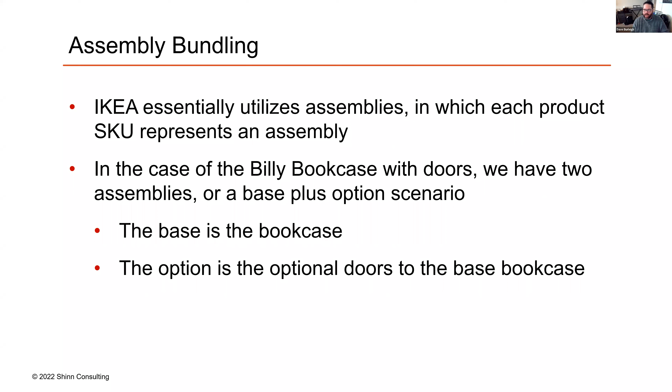In the IKEA model, they essentially use assemblies. For the Billy bookcase, the bookcase itself is one SKU, and the doors are a separate SKU. So similar to how we have a base house plus options, they assemble the same way—the base house in this case is the bookcase, with an option to add doors.

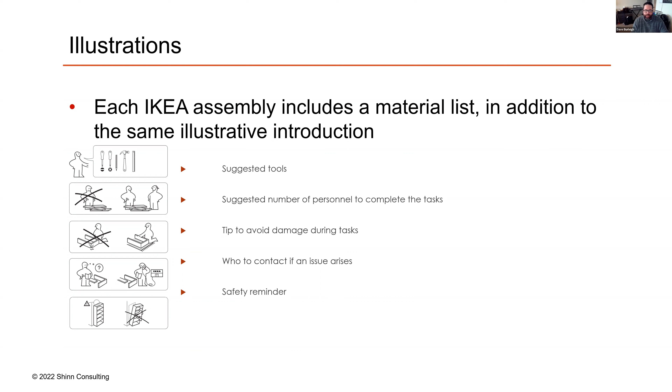Every IKEA assembly includes a material list. We can see their illustrative introduction on the side—they tell you what tools you need, how many people it should take to complete the task, tips to avoid damage while building, what to do if there's a problem, and they always finish with a safety reminder.

For universal application, IKEA uses pictures. If you go to the main page of their assembly guide, they offer instructions in 28 different languages. So instead of writing everything out in 28 languages, they use pictures to show how the parts and pieces go together to get the full assembly of the bookcase.

In addition to the pictures, each step details what parts to use. And if you get into an area where there may be a common error—like windows, corner details, trim details in the building world, things we're constantly fighting over—IKEA zooms into that area to make sure you understand the right way to do it versus the wrong way.

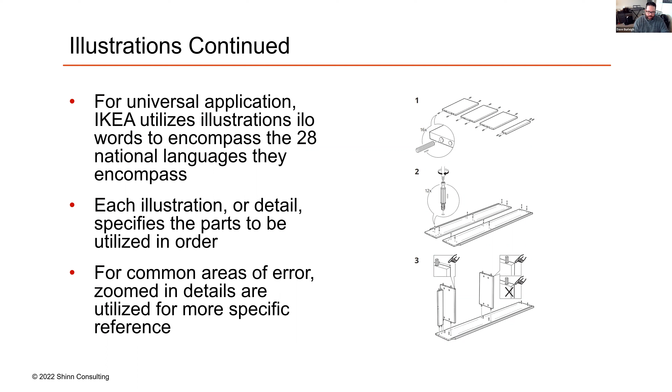They always give you a parts list. In addition to the illustrative version, they include the part number with each one, so you can quickly identify by picture what you should be using. And if you run into a problem, you know exactly what part number you have an issue with.

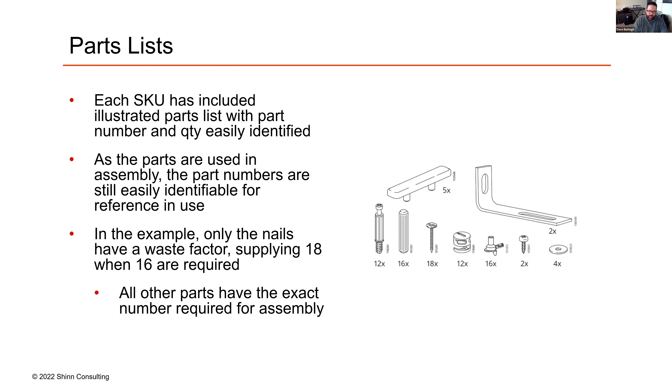In the building world, we think of waste factor as an all-or-nothing equation—we take an entire category like roofing and add a 10% waste factor. If we follow the IKEA method, we should really look at what specifically needs waste. In this example, out of all the different parts, only the nails actually have a waste factor, because that's where they've determined you're going to have a problem—so they give you 2 extra nails up front. Everything else, they give you the exact quantity needed to construct the bookshelf.

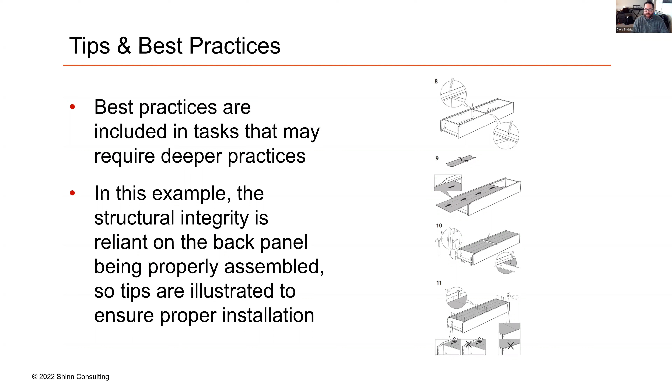Along with the instruction manual, they also give you best practices. In these illustrations, they show you to nail right in the middle of that center support, walking you through how to draw that out so you have a clear line to follow and know exactly how to use that material—again, knowing you only get 2 extra nails, they're helping you not exceed their waste by giving best practices on how to handle that.

For each step of the assembly, they tell you what parts to use, how many of those parts you need, and then show you how those different components come together for that particular step.

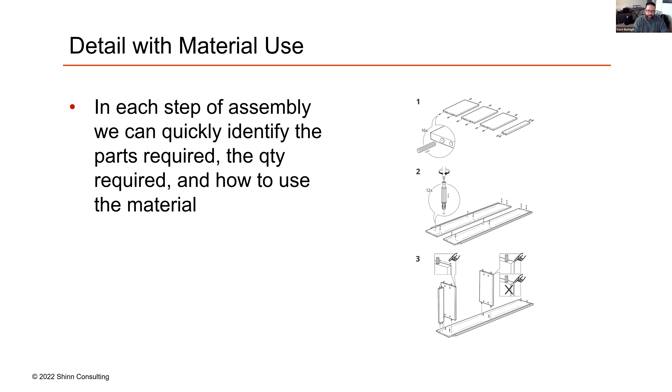As builders, there's a lot of things we should be doing similar to IKEA. If we did a true IKEA book on how to build a home, it would be a massive book. But we can use our detailed books to get into those obscure parts of the home, making sure we have clear trim details drawn out so people understand how we're doing crown molding or trimming out windows.

We want to have window and door details, so when our framer is framing, we don't want him to decide what's the best way to frame that opening. We actually want to tell him this is the way you need to frame the opening, because the amount of material we've supplied is the amount it's actually going to take to do the job. If we give them the material but don't tell them how to use it, we're setting ourselves up for problems.

Same with corners. When we're framing our corners, we like to avoid terminologies like 3-stud corners and 4-stud corners, things that have some gray area in what that actually means. We want to detail how we frame corners, how we frame an inside corner, how we frame an exterior corner, how we frame our wall intersections. We want clear illustrative examples of how we expect that work to be completed.

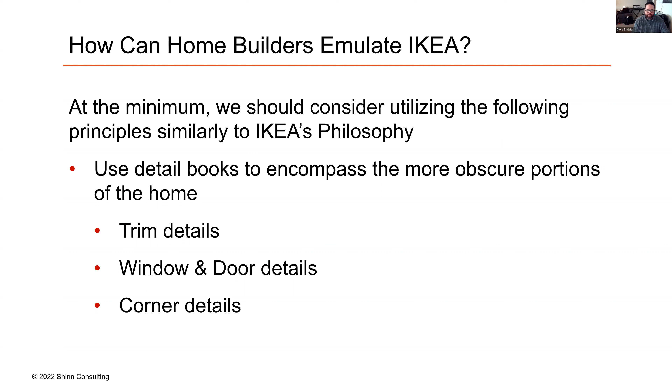Second is communication. We don't need to worry like IKEA does about 28 different languages in construction, but generally speaking there's at least 2 languages being spoken on our job sites. To help overcome that, illustrations really help. If everything is just written out in a scope of work form without illustrative versions of what we need, we're creating a language barrier for ourselves.

We want to make sure that anything we're passionate about, where we're very concerned we want a specific method used or a specific way to do something, we try to use illustrations instead, whether that's from CAD or a detailed book, whatever method you want to use, so that someone can quickly look at the picture and understand what it is you're asking to be done.

Our material lists should also be clear and concise. We want to make sure our descriptions are easy to understand and free of confusion from similar parts. We have multiple parts that go onto a purchase order that are very similar with some minor differences. We want those differences clearly stated so our trade partner understands exactly what it is we're asking to be delivered to the job site.

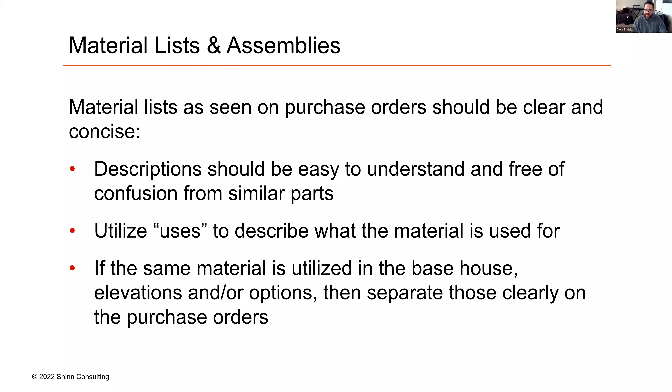By the same token, if we're using the same material—studs is a great example—in both the base house, and then we have additional studs because of an elevation, and additional studs because of structural options, we want those labeled as such so the trade partner understands how many studs went to base house, how many I added or subtracted due to an upgrade in elevation, and how many for each structural option, so they understand exactly what we supplied and for what purpose.

We could turn on another layer to see how much drywall we need. When we build out those assemblies that way, we're following that IKEA method of not worrying about what it takes to build the entire house at this point—I'm worried about what it takes to get through this wall specifically. Then I add all of those assemblies together to get my total material for the home. This also gave us an illustration we can provide to show how to build that specific wall, showing clearly what went into this wall so the framer understands our expectation on a 16-foot, 8-foot tall wall.

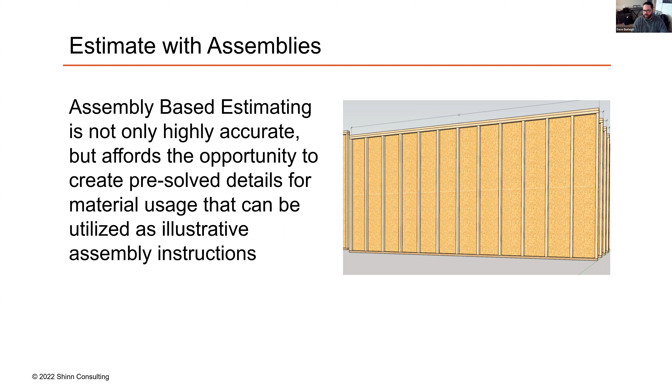To help expedite the ability to use that material, we want to always consider utilizing pre-cut framing, like a Redi-Frame system, or alternatives to it. Each wall in your home is pre-cut and bundled so you can follow the IKEA method of assembling that wall, standing it up, moving to wall number 2, unbundling it, assembling per the instructions, standing it up, and continuing around the house.

You can do this through someone like Redi-Frame, who offers this service to design and pre-cut your entire lumber package. We also have customers who do this in-house — they 3D model the home, figure out their cut lists, and pre-cut all that material before it's sent to the job site.

You can also negotiate this with your framer. There are framers across the country who will show up the day before framing starts and do all that pre-cutting, separating the walls out so that when framing begins, they're ready to start immediately.

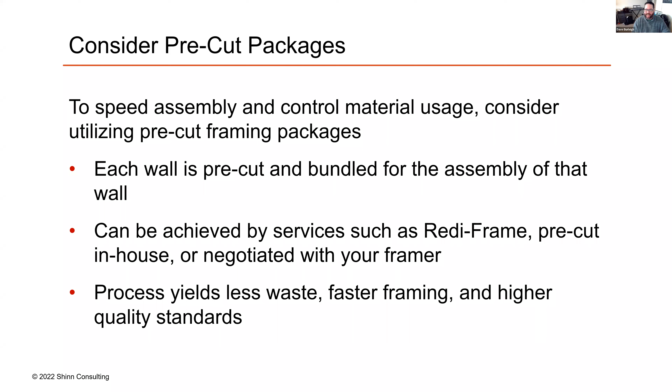We've all been in the position where something is slightly different between one home to the next, and we wind up getting stuck in this back and forth with the home buyer because of these minor differences, because we didn't set a standard of how we're going to get the job done.

The best way to handle controlling our material usage as well as getting our illustrative versions at the same time is to use 3D modeling. So when we model in 3D, one, we're getting our material usage. So we can start turning all the layers on, and I'm going to get my lumber package.

I'm going to get what do I need to build my roof structure? What do I need to roof my home? What do I need for sheathing, drywall, insulation, etc.

But not only am I getting all those materials, I'm also getting the cut sheets that Ed referenced. So now each one of these walls has an independent cut sheet that lets us know where does everything need to be cut, what material am I using to build this wall specifically.

And then the third part is we're getting an illustration. So we have the ability to share this 3D model onto an iPad, a Microsoft Surface, any computer, and our field team, our purchasing team, and our framers can actually move around this home, look at the wall that they're framing, and make sure that they're matching the standard that you set for how that wall should be framed.

It's a great way to go because we're killing a bunch of birds with one stone. So we're getting our estimate done, we're getting our details done, and we're providing those IKEA visual instructions all in one shot. One process encompasses all three of those.

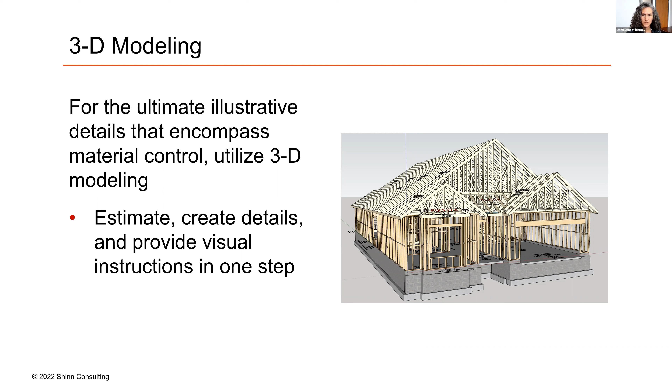Well, excellent, that is the end of the questions. I think there's a couple extra slides here at the end. Does anybody else have any other questions as we go through the last few slides? It looks like we're all set.